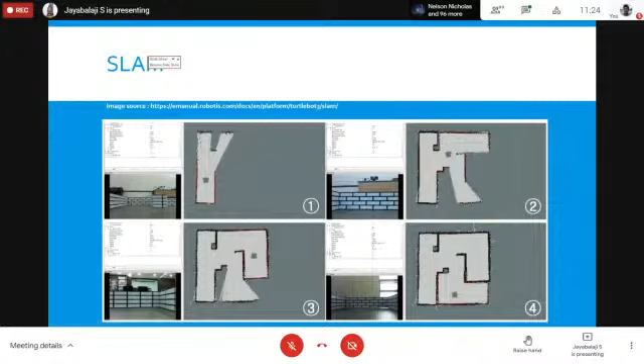For a practical example, this is a simulator, a simulation environment. It's called Gazebo. I will actually provide links to it, and I strongly encourage you all, if you have interest in learning robotics, these are all the tools you have to learn.

This is quite easy. You can learn whatever I'm telling you in about days or weeks. It's quite easy, and you can do a lot of stuff. Like here, in the first picture, you can see there is a robot, and it has two sensors basically - a camera and a laser scanner, a lidar - and then it can see the obstacles. The obstacles are marked with this boundary. Here is a wall, so it has these boundary lines, and then it is detecting the items in the front, in the right side, and then it's kept on exploring.

So when the robot goes from this point to this point, what you see in picture number 2, it has already covered major area here. Then followed by the third picture, in this position it has much more localization, and by the end of the fourth picture, it can see that it has already mapped the complete area.

So now the map knows its locality, and it knows exactly what are all the obstacles, where are all the walls. If you can imagine this is a house, and the robot is a cleaning robot, now you know where the robot is, where the room is, where the wall is, where the staircase is - it shouldn't go there because it will fall down. All these things can be used for its navigation.

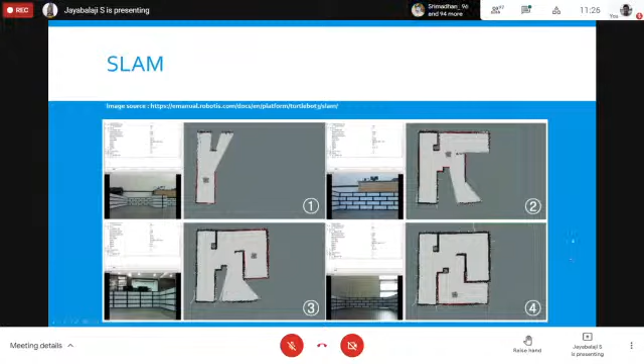So this is a simple example of how you do SLAM in a simulation environment.

I have something interesting to show you. This is the robot, called the Obelix robot. This is done by the University of Freiburg in Germany.

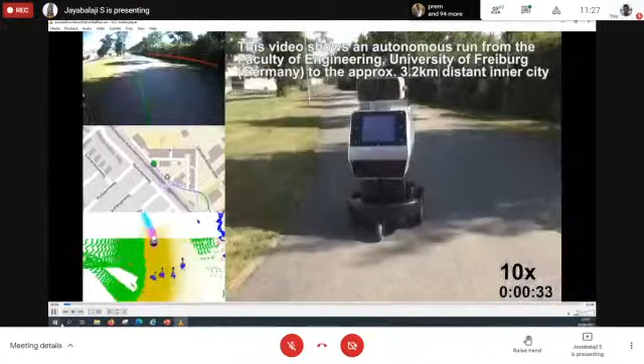Do you guys see the video? Can I have an S? Yes, okay. Thank you, thanks for the confirmation.

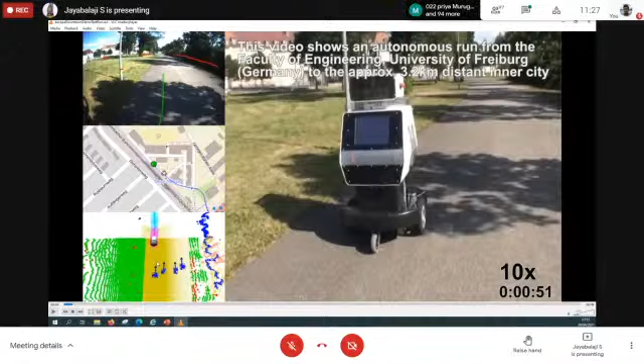As you can see here, the robot has a camera, a long-range camera, and also the lidars. The lidar mapping is what you are seeing to your left. All these things are the point clouds helping identify objects and obstacles. This is superimposed on a map to show where exactly the robot is going, followed by the camera image itself.

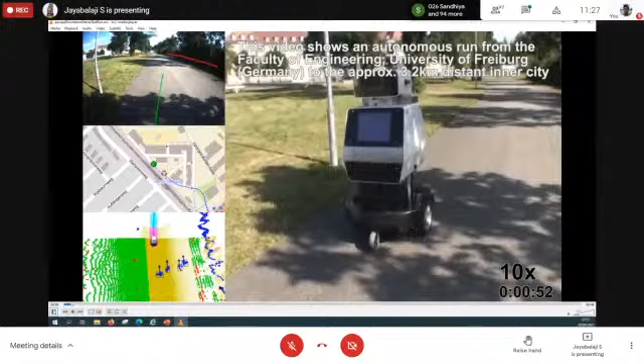So I'll let you guys have a short discussion about it. What you see in the back is 4 people following the robot.

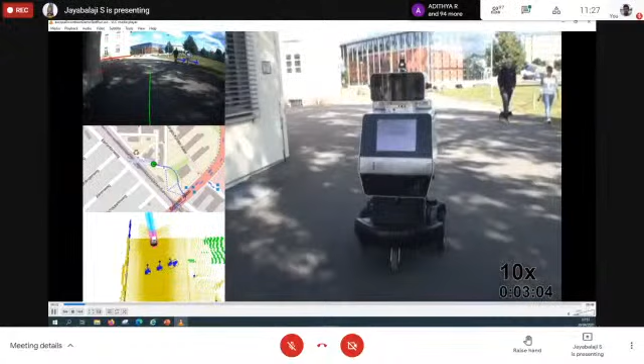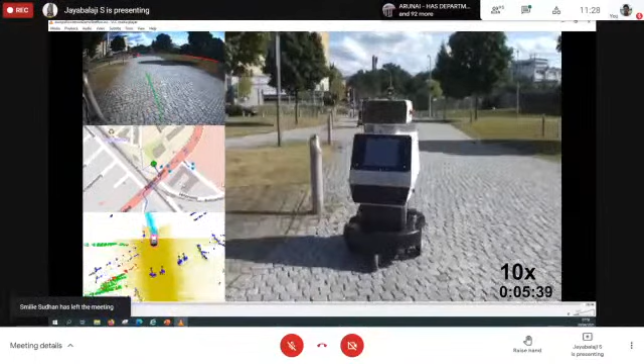And imagine, the path planning is done by the robot itself. So there is nobody telling it to go left or right or whatever.

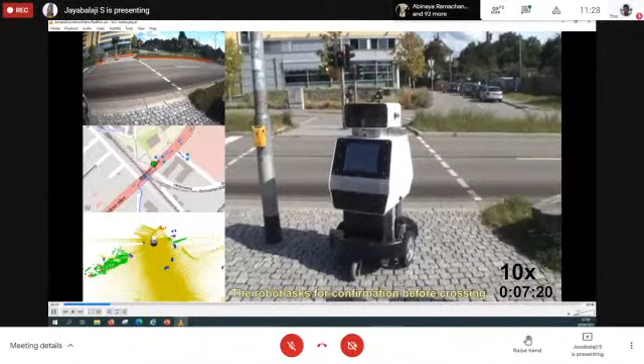So it will wait until there is green, and then it'll proceed.

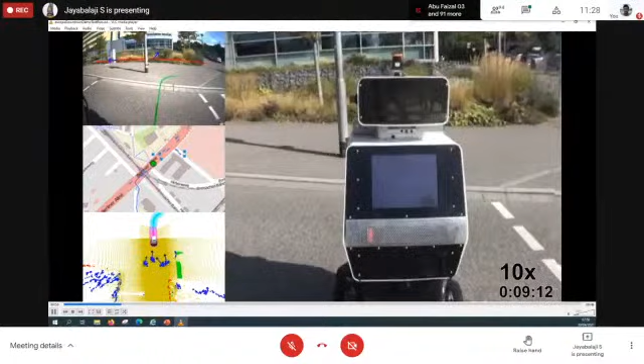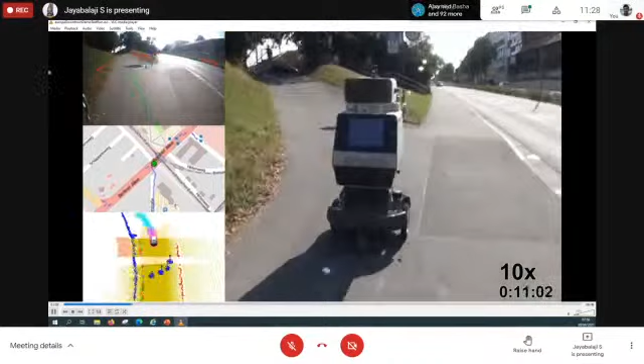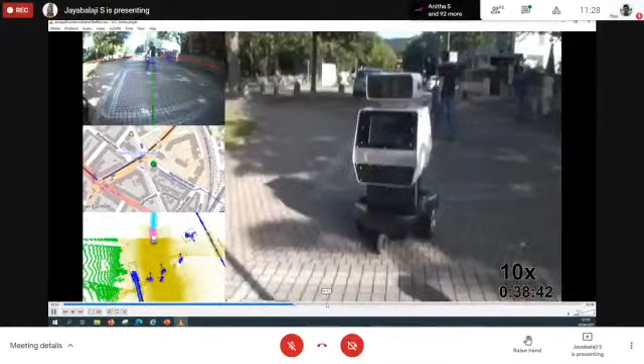I will scroll a little bit up where there are more people. This is really, wait, yeah.

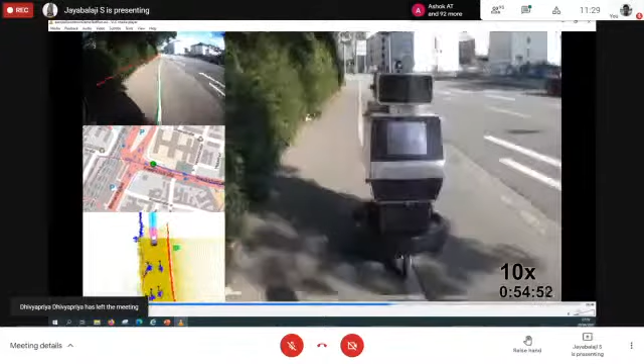It knows how to avoid a cyclist and stay on the pedestrian lane layer, trying not to go into the bicycle lane.

And this is the city center actually, so it can actually navigate in such a tight space, where there is constant movement of people, and it's still able to do it.

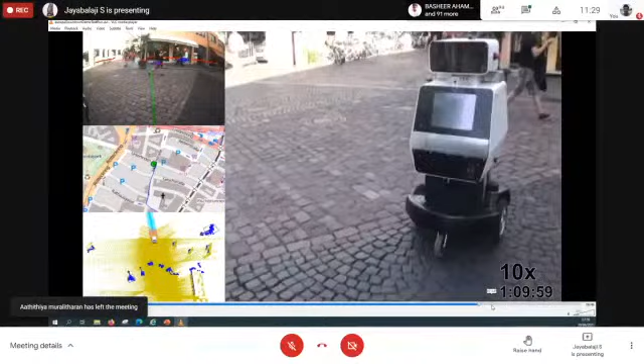Of course, there is some manual interruption every now and then, but at least to what you're seeing, this research is really enormous for the times.

Okay, I think that's enough for the moment.

So what are all the other robots we have? We have, for example, logistics. There are autonomous navigating robots that's used, for instance, in the food delivery business. So it delivers food, and also it's being actively used in grocery delivery.

So what are all the other applications? It can also be used in case of last mile delivery. What is last mile delivery is you have a big truck, an Amazon truck or whatever, or a UPS truck, which is bringing parcels, but it cannot reach your house or it cannot reach your apartment block.

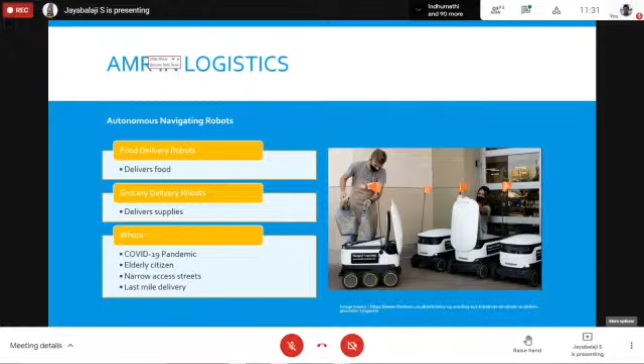So you can put your things in one of these small robots, and the robots could deliver it to your place. So how cool is that?

Then there are these AMR robots for Industry 4.0. I know there are mechanic students in this forum. I'll tell a little bit about Industry 4.0. Industry 4.0 itself is a big topic on its own, so I cannot cover it fully. I have to do a dedicated session for it. But in a nutshell, what is Industry 4.0 is...

Normally in an industry, if you are making one product, let's say you are making a car.

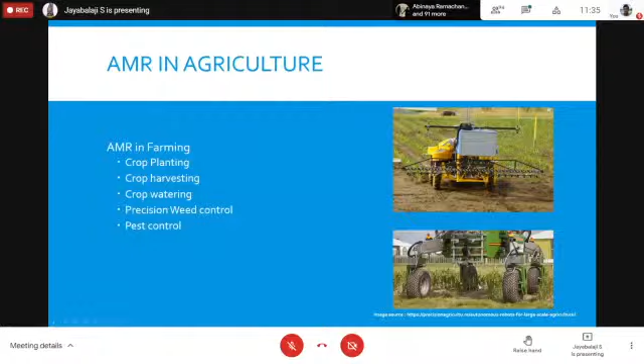Some use in agriculture - what you're seeing here is a robot that can actually water the plants, or even do pest control, put fertilizers, etc. And there are also robots for planting, harvesting, weed control, all these things.

And in the area of safety, there are robots meant for firefighting. This can be autonomously driven, or remotely operated by a firefighter in the back, giving much more access to areas firefighters cannot reach easily, or giving more safety for the firefighters themselves so they don't have to encounter the line of fire directly, but let the robot do its job. There are also robots for search and rescue operations in natural calamities.

For instance, autonomous boats or autonomous drones that can do aerial surveying, remote sensing, etc. Aerial vehicles that can remote sense enemy targets, or even robots that can do scanning so that there are no landmines in a war zone.

All right, so there are even more robots than what we are seeing here. There are robots used in the mining industry that can do mining, and several other industries. The scope and usage is enormous, and the sky's the limit for this industry. This is budding, meaning it is evolving, and there can be a lot of new applications developed eventually.

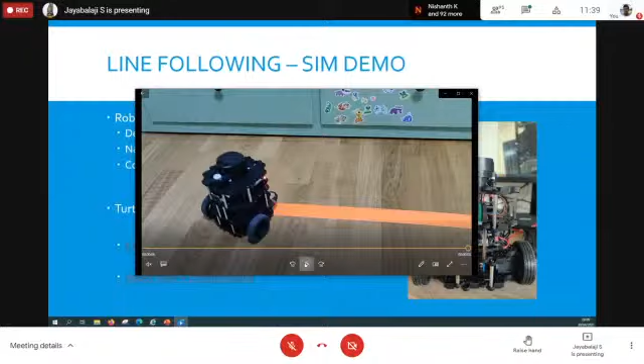You guys see the video? Can I have a yes? Yes, sir, yes, sir. All right, so as you can see here, the robot just follows the line and then it's navigating.

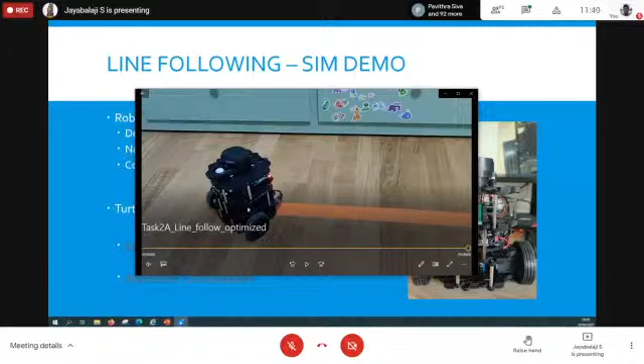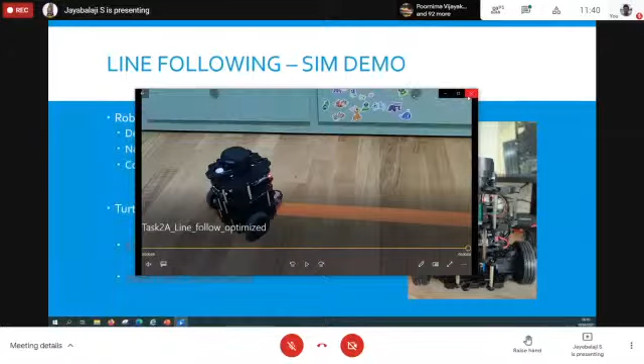The direction is controlled, like I said, by the differential acceleration between these two wheels. One wheel goes slow, another one goes fast, and then it turns the direction. So this is from the view of the person. Let's have a view from the robot's standpoint, let's see how the robot looks at this.

Here you go. I'll pause there for a moment and then explain what you're seeing in the robot.